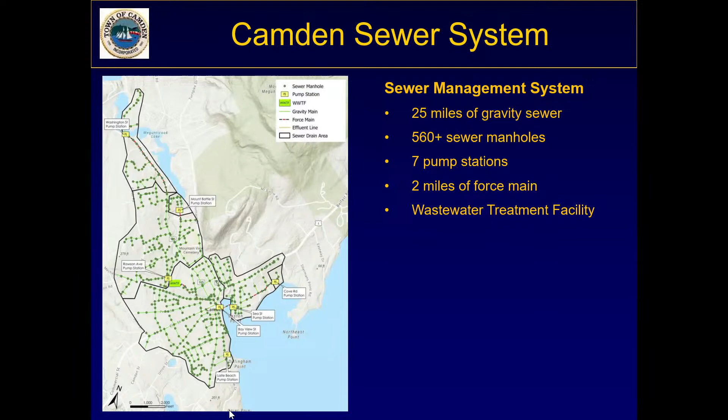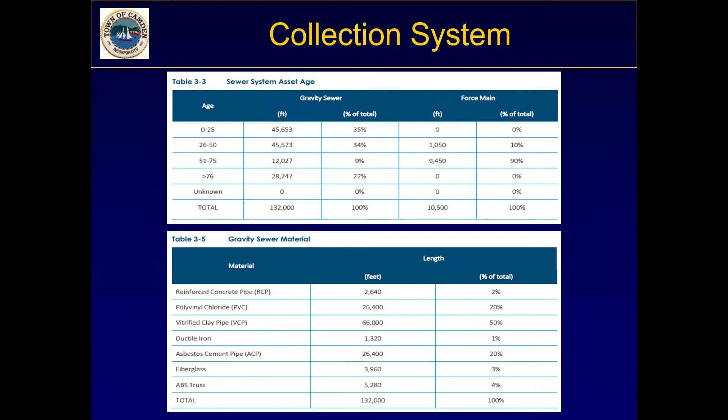The pressure pipes, or force mains, are primarily cast iron. Most of those went in with the construction of the treatment plant right around 1970, so approximately 55 years old. That's right around the end of expected life for a cast iron sewer force main, and in some cases beyond end of life, depending on soil chemistry and flow conditions. So really what I'm trying to show here is that we have a significant amount of older pipe that is probably at or about the end of its useful life.

This is a quick rundown of the 7 pump stations located in our system. The 2 large ones are the Bayview pump station and the Rawson Avenue pump station. Both of those pump directly to the wastewater treatment facility. Actually, all of the flow that comes to the treatment facility comes from one of those 2 stations, with the exception of a single bathroom located at the treatment plant.

Bayview, on a typical day in August when it's not raining too hard and we don't have particularly high groundwater, flow is around 360 gallons per minute. When we have 2 pumps running, we can discharge at a rate of 2,600 gallons per minute. But despite that significant difference between our typical flow and our peak flow, we have periodic sanitary sewer overflows at that location. That means the flow rate coming into the pump station exceeds that peak discharge of 2,600 GPM, and at that point we overboard raw sewage to the harbor. That is a sanitary sewer overflow.

Sea Street is our other location in the system where we periodically have SSO events. That's a slightly smaller station, 70 odd GPM typical flow, 650 GPM peak. But again, because of the peaking factor during precipitation events, we do see SSO events there. I'll get a little bit more detail on that SSO in the next slide.

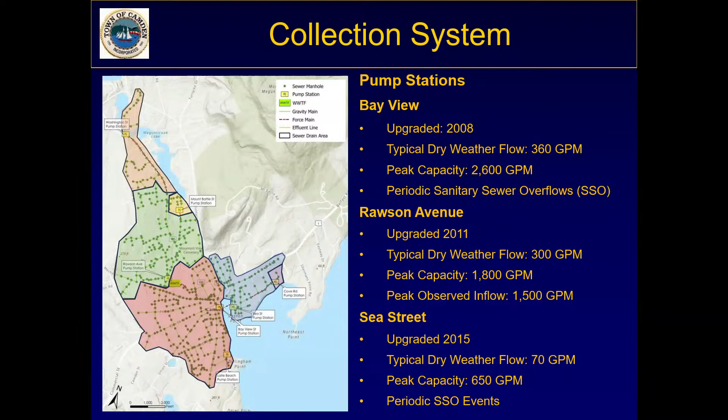Rawson Avenue, our shared pump station, typical flow into that station, the combined Camden and Rockport flows, is about 300 gallons per minute. The peak discharge with our 2 pumps running is 1,800 gallons per minute, and we've had some peak observed flow of around 1,500 gallons per minute. That was during a period of high groundwater and a large rain event, and that represents the most flow we've seen come to the station to date. So that's at about 85% of the station's capacity, giving an idea that if nothing changes with our precipitation events or flow conditions, we still have a little bit of bandwidth at Rawson Avenue. That's reflected by the fact that we haven't had an SSO event there in the recorded past, certainly not since we've been reporting SSO events.

These are our 4 smaller pump stations: Washington, Cove Road, Mount Battie, and Laite Beach. You can note from the flows, these are quite small, more in the 5 to 20 gallons per minute range. I've noted the capacities there. Laite Beach picks up the public restroom and one house, so it's very small. For these stations, this isn't really part of Rockport's interaction with the system, but I note it there to give a full inventory. These are not capacity limited right now, and we don't expect them to be. There's plenty of bandwidth at those stations.

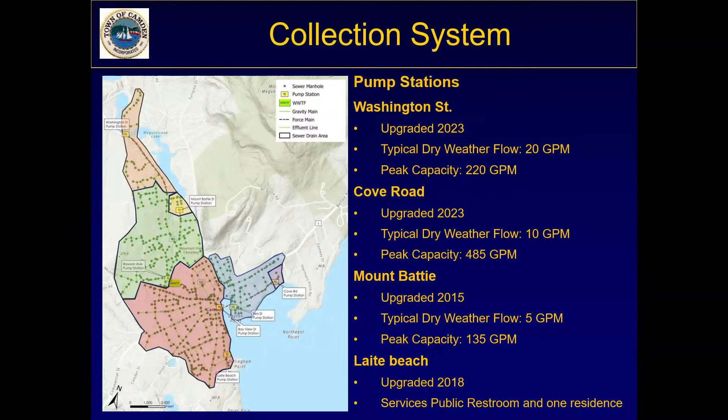So back to the SSO events, the sanitary sewer overflows. As noted, those occur at our Sea Street and Bayview pump stations.

That's where we actually have overflow structures. Typically, we see between 3 and 8 events per year. This graph shows a lot of data and it's a little hard to follow. The orange line shows the annual precipitation amount, and the blue bar graphs give you total volume of wastewater discharged annually.

You'll see that they don't necessarily correlate particularly well. A wet year may or may not have a lot of SSO discharges, and a dry year may actually too, it's not a direct correlation. So what we've seen is that it's really a combination of antecedent conditions that trigger those SSOs, one or more of the following items.

Either we have spring high groundwater tables in conjunction with a precipitation event, or perhaps an extreme high tide event in conjunction with a precipitation event, or there could be frozen ground conditions with a lot of snow melt that could trigger an SSO. And then the really high intensity precipitation events we've been seeing, those 2 or 3 inches of rainfall in a short period of time, often that'll trigger an SSO.

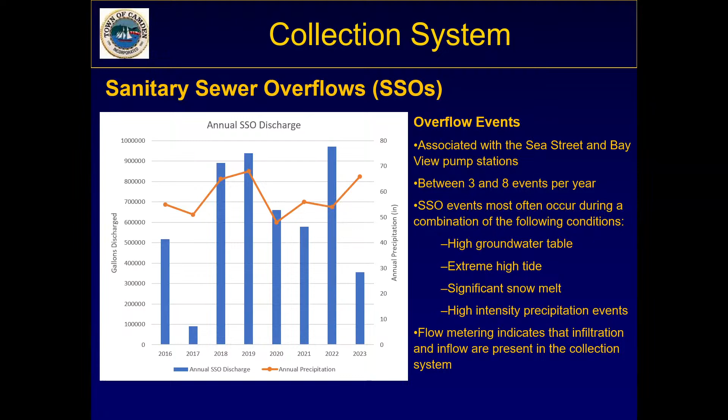Noted here on the bottom, our flow metering indicates that infiltration and inflow are contributing factors to those sanitary sewer overflows. So to give a brief discussion of what that means: inflow is a direct connection of precipitation, rainwater, or snow melt to the sewer system. That could be a catch basin that's tied directly to the sewer versus the stormwater, or a roof leader that's tied directly into the sewer. Those would be some common ones.

Whereas infiltration is really groundwater getting into breaks and cracks in the pipe. So the brown house here is an example of really all the bad things. You've got a roof leader that's connected, a foundation drain that's connected, a catch basin in the road that's connected to the sewer, cracks in the sewer service, cracks in the pipe, and an illicit connection between someone's house and the stormwater line. So that would be a worst case house.

Our blue house here on the right, all is well. The stormwater is directed to the separate stormwater system, and the sanitary sewage is nicely tied into the sanitary sewer system. So again, we're seeing SSOs a lot because we have infiltration and inflow in our system.

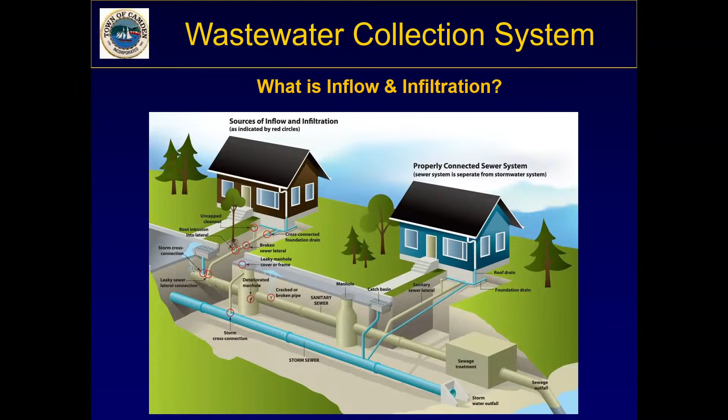Jumping from the collection system to the treatment facility, this is just an aerial photo showing the flow through the plant. Flow from Rawson Avenue and Bayview pump stations comes in to our headworks, where we have mechanical screening, essentially bar racks spaced out to pick up large debris. There's aerated grit to remove sand that gets into the system before it gets sent through our pumps.

From the headworks, after the screenings and grit removal, it flows into our secondary treatment. That's a typical secondary treatment system where they're aerated tanks. We're providing a lot of oxygen and maintaining a population of bacteria and other microorganisms. Those bugs break down the organic carbon in the waste stream for us, and that really is the primary treatment mechanism at our treatment plant.

It's followed by 2 clarifiers. That's really just about creating a big stilling well, a quiescent environment for the water to allow more material to settle out and collect at the bottom of those tanks.

The other thing that we will collect from there and from our secondary is sludge. Sludge is the byproduct of all of those bugs eating and reproducing. They, just like us, when they eat and reproduce, create new cells. That new cellular mass is sludge, and we have to dispose of that sludge. Some of it's recycled, some of it's disposed.

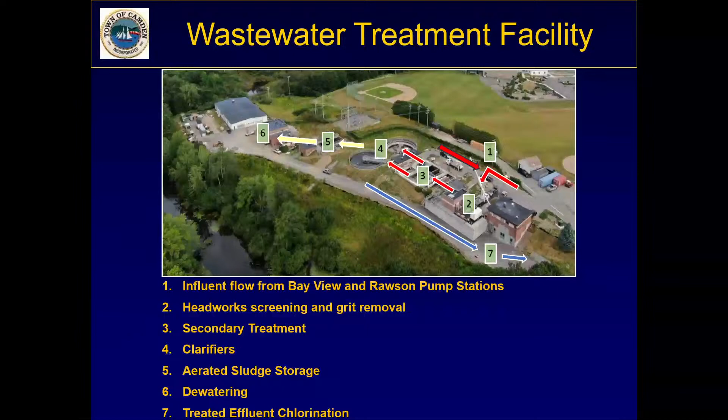Getting into the numbers and some of the details of the standards here, this is our discharge permit, or part of our discharge permit. These are the regulatory requirements imposed on us by DEP for our effluent stream. You can see that they include a flow rate, which is a maximum or an average million gallon per day rate, and we report that on a monthly basis.

BOD, that's biological oxygen demand, really just the organic carbon that's in the waste stream. Total suspended solids, that's whether it looks murky or not. And then fecal coliform, settleable solids, total residual chlorine, mercury, and pH.

So these are the requirements that we sample for on a regular basis, in accordance with the frequency defined by DEP. I'll give an example of some results. Generally speaking, for the parameters you see here, the one we exceed on a regular basis is our monthly average flow. The limit is 1.21 million gallons per day, and periodically we do see exceedances of that, which I'll show in the next slide.

So these are our monthly average flows of the effluent from the treatment plant over the last approximately 5 years. The highlighted cells are the months where we exceeded the permit threshold of 1.21 million gallons per day. You'll note that they occur most frequently in March and April, the periods when we have elevated groundwater table and see high baseline flow to the plant.

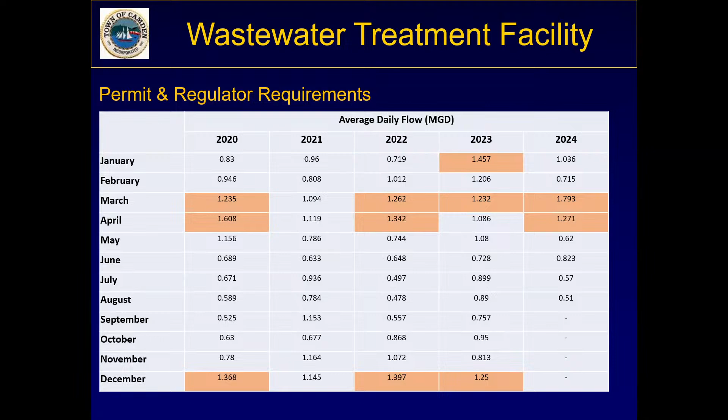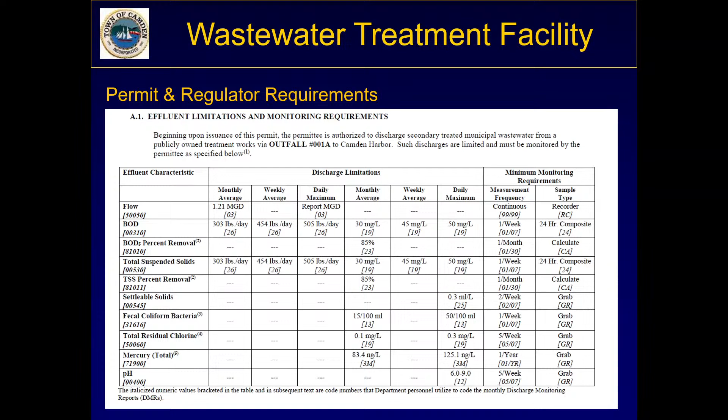As far as other parameters on here where we've had exceedances, it's incredibly rare. Going back through all of the discharge reports, I found 2 exceedances of BOD in the last 5 years, and they were very minor exceedances. I have the hard copy somewhere in that binder over there.

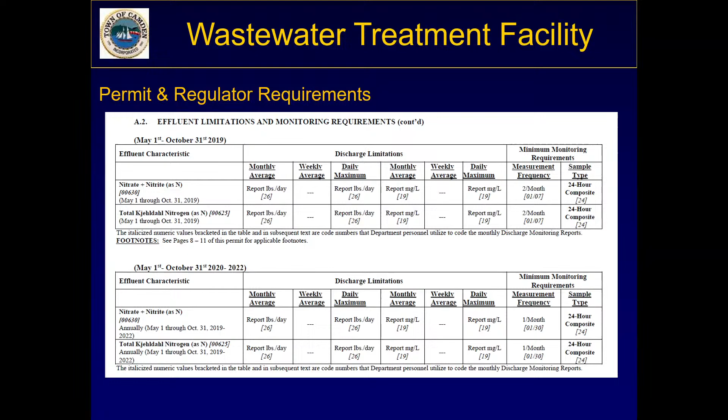The other parameters that we are required to sample on a periodic basis and report to DEP, as part of our current wastewater discharge permit, we were required to sample nitrogen from 2019 through 2022, including nitrate, nitrite, that's your inorganic nitrogen, and TKN, that's your organic nitrogen, or really synonymous with ammonia.

The data from the most recent 2022 nitrogen sampling, I'm putting it up here. You can see that there seems to be a little bit of an inverse relationship between your organic nitrogen and your inorganic nitrogen. That's really a function of how well the secondary treatment is doing at the treatment plant.

Nitrification, which is the conversion of ammonia to nitrite and then subsequently nitrate, can happen in an aerated secondary treatment system if it's operating really well and you've chewed up all of the organic carbon there, which is preferentially broken down before the ammonia. So you can see some months we have relatively high organic nitrogen versus inorganic nitrogen, and then in August, September, they're a little bit more balanced.

I can't speak to whether or not this nitrogen loading is particularly high relative to other plants, or particularly high for Camden Harbor and Camden Harbor's specific mixing and dilution. And I can't really say whether this is going to drive future permit requirements, but I can say that I have every expectation that at some point in the future, a discharge permit from DEP will include limits for nitrogen. They've expressed that to most communities in Maine, that if you have a marine discharge, you should expect to see nitrogen on your discharge permit at some point.

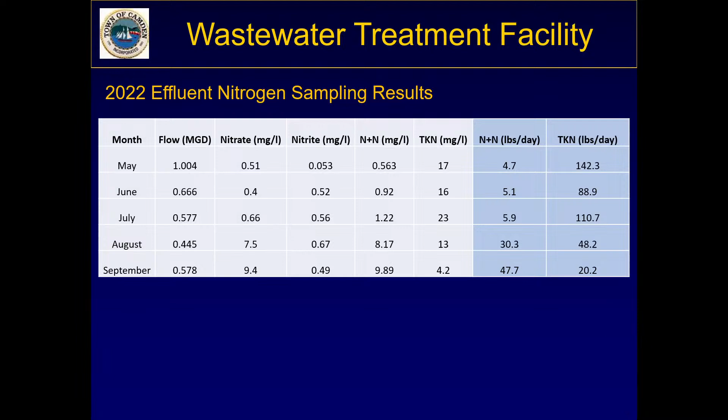It's not there today, and I can't really speak to whether we would be exceeding permit thresholds or not in the future with these numbers. I merely present them because we have them and we can all chew on them together.

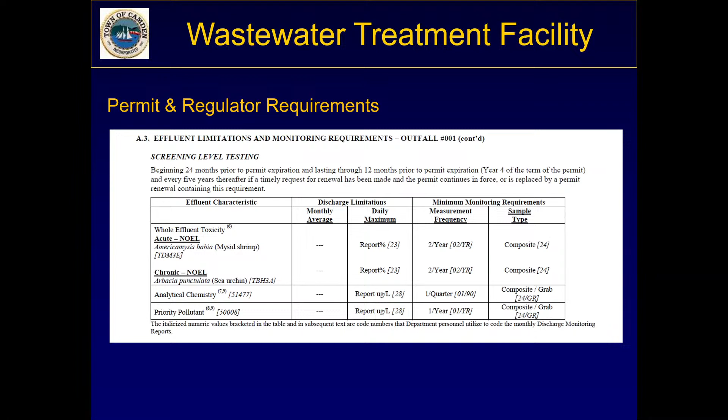Getting into a little bit more analytical detail, we're also required to periodically conduct sampling on the effluent for what really amounts to toxicity and priority pollutants. The whole effluent toxicity, that's looking at the survivability of shrimp and sea urchins in our waste stream. And then our analytical chemistry and priority pollutants are other things we would be looking for, particularly priority pollutants for toxicity in the receiving waters.

This is a lot of data. I'm just going to try and give you a highlight of what it means. The first couple numbers up there are the whole effluent toxicity, or WET, sampling.

This one is a little bit counterintuitive because the number reported is the concentration of wastewater where you start to see a statistical decrease in the survivability of the shrimp and urchins. A higher number is good, because at 100% concentration of effluent, we'd see no statistical change in survivability. If it were at 100 times dilution, so 1%, and we were seeing impacts, that would mean the waste stream had a significantly more toxic impact.

For this round of sampling, the reported value for shrimp is greater than 100%. That means when they took undiluted 100% concentration of our effluent and put the shrimp into it, they didn't see a statistical change in survivability. For the sea urchins, it's 25%, a 4-to-1 dilution, at which they started to see a statistical decrease—I believe it's the fertility of the sea urchins that they're tracking. So those are both pretty good numbers.

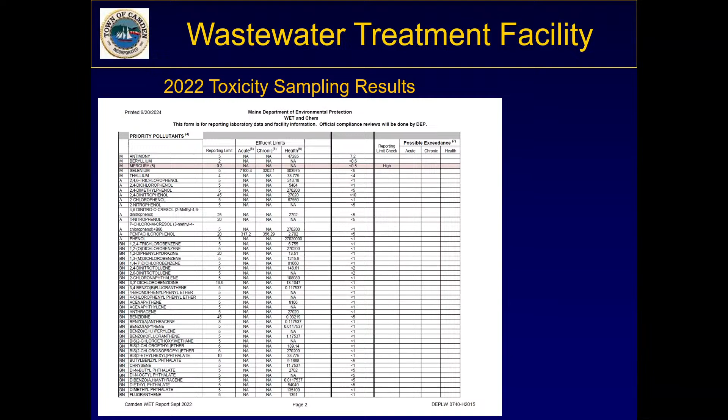And you may have noted—sorry, I breezed past this so quickly—there's a highlight here on mercury. It was below detection, but the detection limit at the time, what the laboratory was able to achieve with this particular sample, was higher than the reporting limit. So that means the laboratory didn't do as well as the state would like.

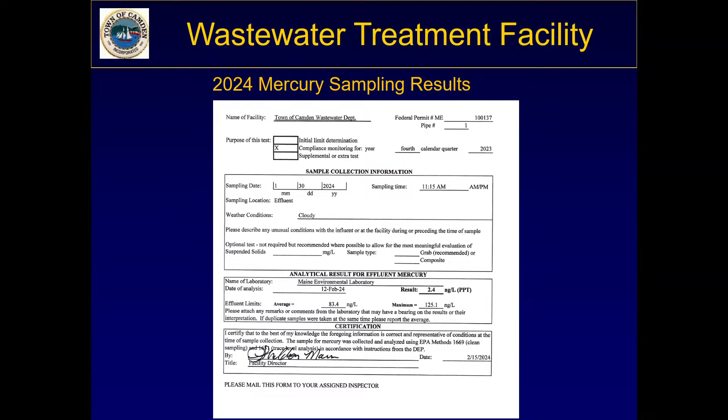We follow up with subsequent mercury sampling with a much lower detection limit via what they call clean mercury sampling, getting a parts per trillion level of analysis. This value, 2.4 parts per trillion of mercury in the effluent, is pretty consistent and well below the average effluent limitations for treatment facilities in the state that have effluent limits for mercury. In short, mercury doesn't seem to be a problem.

PFAS—I'm sure everybody's familiar with PFAS, the forever chemicals most commonly associated with fireproofing, flame retardants, and just about everything we package our food on and make our cosmetics out of. This is an emerging concern, largely because of its persistence in the environment, our inability to get rid of it, and the fact that we don't really know what the impacts of PFAS are on human health or ecological health. DEP has asked us to participate in a couple rounds of PFAS sampling at the plant.

That includes effluent, influent, and various places throughout the collection system. This is really just DEP's efforts to try to understand, not necessarily the magnitude of the problem, but what magnitudes of PFAS are present in these systems. Again, there's an enormous amount of work still needed to really understand at what concentration we start having negative impacts to human health and the environment.

That said, you can see in our plant effluent when we sampled in 2023, PFAS is present at around 100 parts per trillion—that's nanograms per liter. Plant influent, not too dissimilar when we sampled it this year, about 80 parts per trillion.

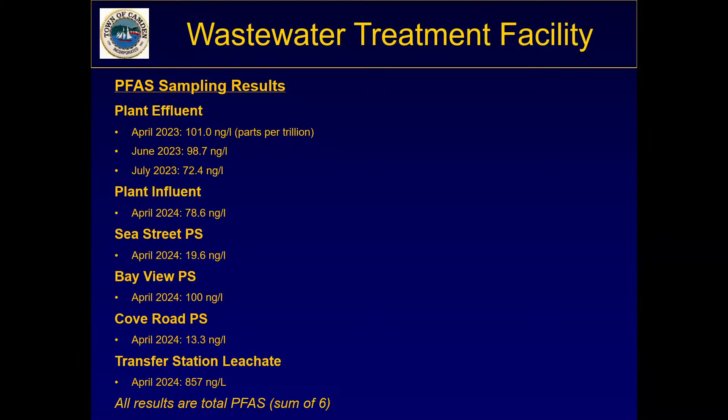We also sampled the leachate coming from the transfer station. When I say leachate, what we were really sampling was the effluent stream from the recovery well at the landfill. That came in at 857 parts per trillion. Landfill leachate is a known source of PFAS.

More data, getting into some flow data. I'm going to jump right to the numbers at the bottom of this screen. This is over the last several years. The total flow through the wastewater treatment facility averages about 27 million gallons a month, and total flow through the Rawson Ave pump station is about 9.2 million gallons per month.

Midcoast solid waste's contribution to that is about 1.7 million gallons. Rockport's contribution is about 2.2 million gallons. Again, this is per month.

So you can see that Midcoast solid waste makes up about 6.15% of the waste stream to the treatment plant, and Rockport makes up about 9.3% of the flow to the treatment plant. Rockport contributes about 26% of the flow to the Rawson Ave pump station. So about 1 in 10 gallons through the plant comes from Rockport, and about 1 in 4 gallons through the Rawson Ave pump station is from Rockport.

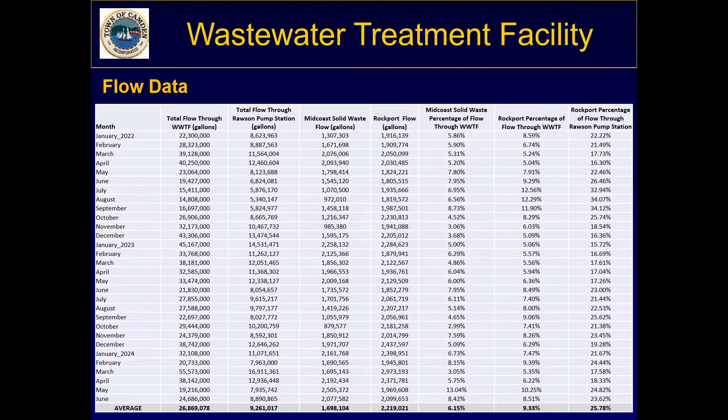Giving you a sense of where the treatment plant is at, it recently underwent a fairly comprehensive upgrade. That upgrade included new headworks, including an automated bar rack to screen out the large solids coming into the plant.

There's a new backup generator — previously the plant didn't have backup power. There were also upgrades made to secondary treatment, primarily new blowers and piping.

The addition of this modified Ludzack-Ettinger process, the MLE process, is essentially an anaerobic or anoxic tank at the head of secondary treatment. This helps minimize or mitigate the formation of floc-forming bacteria, keeping the system less scummy, with fewer floatable solids, and generally improving performance in secondary treatment.

It should be noted that an MLE process is not a nutrient removal process — it's not a nitrification, denitrification process. You may see some improvement in nitrification through the overall better performance of secondary treatment, but it's not designed for nutrient removal. A decision was made at the time of design that they were not going to include this, because it would have required additional tankage to secondary treatment.

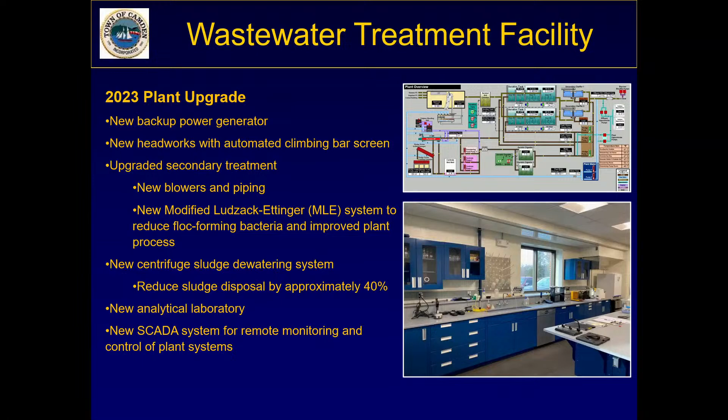That was a lot. I'm happy to answer any questions at the end of this presentation, but right now I'm going to turn it over to Audrey to talk about funding.

So just to give you a little background on how we pay for operations of the plant and capital improvements: prior to November of 2018, any major capital improvements — anything that really needed to be financed — was not paid for by ratepayers. It was something funded by taxpayers.

All the other operations at the plant and some of the smaller capital improvements were funded through our wastewater budget and the user rates calculated through that. The reason that changed was that in order for Camden to receive a $1.4 million grant for the plant and collection system upgrades, we had plant upgrades, but there were also some major upgrades to the collection system that occurred as well.

The force main that connected the Sea Street pump station to the Bayview Street pump station was replaced, and there were a number of the smaller pump stations that were completely upgraded as part of that.

That grant money combined with a very low interest rate fixed over 30 years was only going to be possible because this program through USDA Rural Development required funding through user rates as opposed to taxes. So the decision was made by the select board and then by the townspeople to shift the funding model.

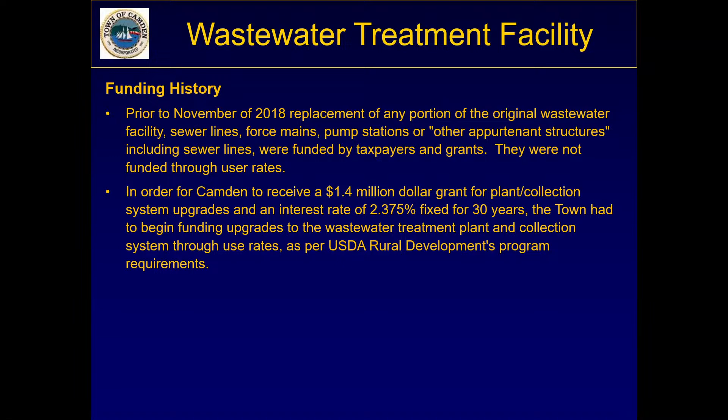For a period of time there was a recapture agreement, but by the time the actual debt service for the project needed to be paid, there was a charter amendment that allowed those improvements to be financed by ratepayers. This is important because it changed the billing structure, and it's something I think Rockport users on the Camden system notice.

FY20 was really the first year that the town created and funded an account specifically for the purpose of not creating a shock to users when we had to make the debt service payments for the treatment plant upgrades, because there was at least a 3-year period between when we got financing for the project and when we were actually paying the debt service on the improvements once the project was completed.

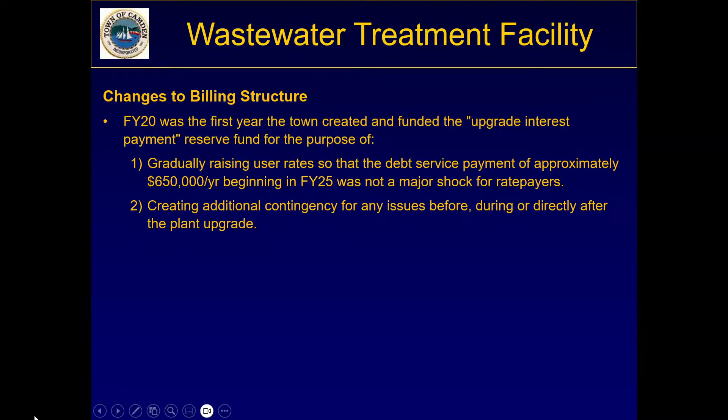Over this time, we wanted to gradually raise user rates to prepare everybody for that debt service payment. Now we're in the second financial year where we're paying that debt service, and it's about a $650,000 payment per year. The idea was to get everybody accustomed to that, as well as to have additional contingency for any issues that occurred before, during, or directly after the upgrade to the treatment plant.

2020 was supposed to be the first year that an additional $100,000 was placed in that reserve account. However, for some reason, the billing information wasn't changed with Maine Water.

Around 2021, and I think this is something very familiar to everyone, the rate increase from both 2020 and what was budgeted for in 2021 was spread across those financial years. So that was quite a significant increase over that period of time.

We continued to up the amount that we put into that account for 2022 and 2023, and then we stopped funding it in 2024 because that was the first year of our debt service repayment.

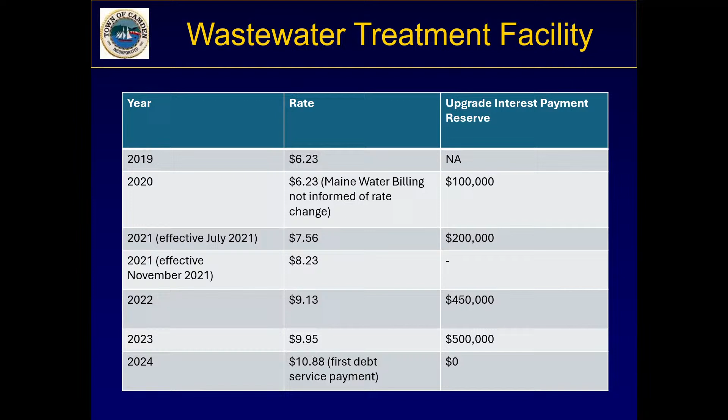Is that then showing that the rate changed mid-course of that fiscal year? Yes. So that rate changed twice over that period - there was the original raise in rate, and then midway through the year another increase, basically up $2 per 100 cubic feet.

Over to Dave. Okay, now we've gone over basically the whole system. Audra's gone over the financial part. Now we're going to talk a little bit about what we're going to do to try to correct these problems that exist.

I'm going to talk about the collection system priorities: the rehabilitation and replacement of aging infrastructure, the mitigation of SSO events, the expanding of public sewer to unsewered areas, and upcoming collection system projects, including sewer rehabilitation and replacement on Mechanic Street, Limerock Street, Union and Mountain, and sewer extension on Molyneaux and John Street.

On Molyneaux, we're extending the sewer to service 52 units at the Mountainside community. On John Street, we're basically putting in a new line that doesn't exist there to serve about 20 to 25 single-family homes, along with an upgrade to the sidewalk.

On Bay View and Rawson Avenue stations, we're looking at a force main replacement, and Justin had touched upon that - we're kind of at our life expectancy for those two force mains. So we're looking at these collectively, but we're looking at these projects.

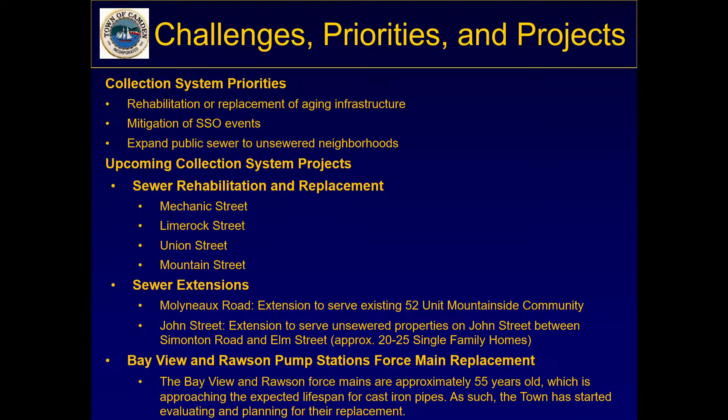So how we're doing that is we're using a project priority sequencing and project completion matrix, which looks at all components of a road. And when I say a road, I mean all pieces of it.

This is talking about sewer condition, stormwater condition, sidewalk and multimodal needs, water, potable water, road surface, traffic calming, shade trees, and matching funds. So all these mean something when you look at a total road. What we're doing is basically the driver for these projects is our sewer system, because our sewer system is our deepest utility within the road, and it's the most expensive to replace.

So we're going through and systematically cameraing these lines and then giving these a grade of between 1 and 5. And then based on the results of all of those criteria, we'll rank which one of these projects rises to the top. By using this process, the objective is to tackle the larger problems and at the same time resolve most of the problem with I&I.

As you can see, we're under evaluation on Limerock Street for sewer conditions, as well as on Mechanic Street. We are finding some significant problems on Mechanic Street, which also happens to be where we have our force main that's going to the treatment plant. But we haven't completed the whole process yet, and once that's all done, that'll help guide us in the right direction to use the $12.5 million funding that voters approved in a bond to make these improvements.

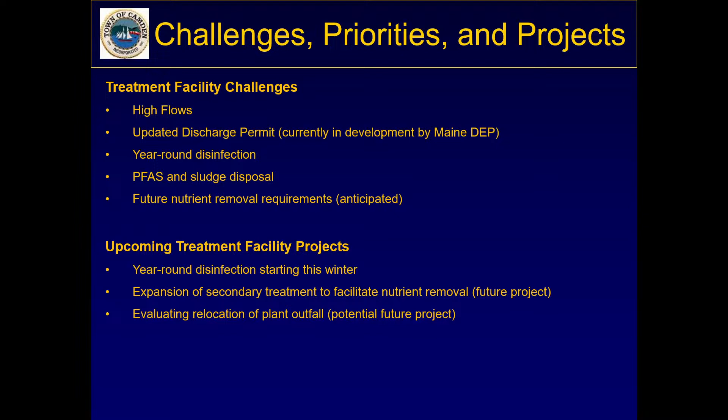That's pretty much it. I think Audra and Justin did an excellent job, and we have a really good team, and I think we're going to be able to make some massive improvements with the system. But that's where we're at, and we're looking forward to hearing what the Rockport collection system is all about.

So if there's any questions about our system, we're more than welcome to answer them. We can probably all come up here, and the three of us can chime in on whoever has probably the best answer. Or we could do rock, paper, scissors, and we'll get that person.

No questions, I'll stay seated. Alice.

I don't know how much this might not be something you're prepared to answer today, since we're just getting started with the new permit, but the classification of the water body we're discharging to is a huge driver of the standards. My understanding is we're currently at Class B, and there's been talk about wanting a higher standard in the future. The driver of this permit has been just not making it much worse. Is that part of your calculation, or do you have any idea?

No, not at this time. I will say that in '23 the previous superintendent submitted the application for a new discharge permit. I think our current permit expired at the end of '23, and DEP is taking, in some cases, 2 to 3 years to issue a permit, but I understand they've hired new permit writers and are speeding up turnaround. Coming from South Portland, we waited 3 years for a new discharge permit after ours expired. The feedback I've gotten from folks who were here when the application was submitted is that we likely won't see significant changes to our effluent requirements with the next permit, except for the requirement of year-round disinfection. So we're not tracking any major changes to our discharge requirements for the permit we're currently expecting. But that's not to say it's strictly a 5-year renewal cycle—the next one should be around 2028, but it'll probably push further. I can't honestly speak to that beyond what I've said.

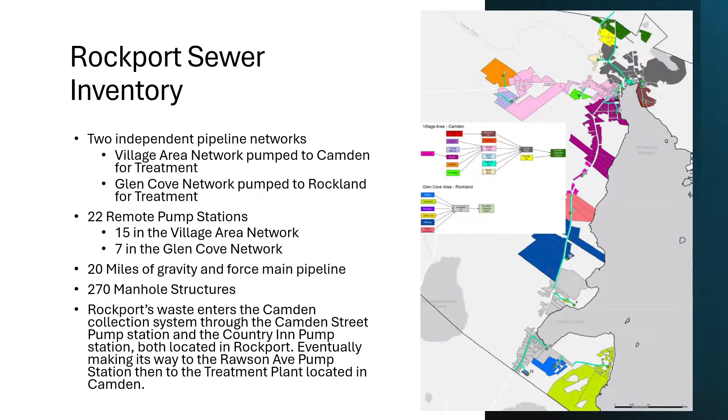That pump station's right on the side of the road. That's where Rockport's waste largely comes in. We also have the Country Inn, which is a separate entry point, but predominantly most of what we have is coming through Camden Street.

In terms of our flow data, currently our billed usage is around 49,100 cubic feet, which equates to about 99,000 gallons a day for our entire system. Our average annual usage to Camden is about 63,000 gallons a day when you average it out, or 63% of our total flows for our entire system come to Camden.

Which only represents about 39.4% of our allocated allowance in the last interlocal agreement. Our average usage to Rockland is about 18,100 cubic feet, or about 37% of our total annual flows. So about two-thirds of our flows come to Camden, and the remaining third goes to Rockland.

We undertook a significant I&I study in 2019. At that point, we did individual inspections of all of our properties that were either connected to or had the ability to connect to our sewer system. We were able to complete this effort in a five-month period, that summer into the fall. We did find some illegal connections and corrected those at that time.

In the summer of 2019, we also replaced ground piping on School Street and Summer Street, which eliminated some I&I and stormwater issues that were happening on those roads. And as we continue to pave roads that are on our sewer system, we make sure that we are inspecting the in-ground pipes before we are laying new pavement.

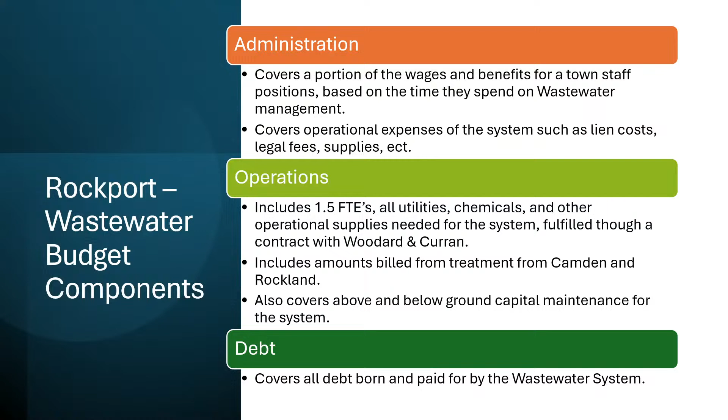So our billing is very simple in that it's largely farmed out. We work with Maine Water. Maine Water circulates our bills on our behalf. We have two separate fees that are part of our bills. I'll do it in reverse order.

Usage is very clear to understand: you use this much water, you're billed this much wastewater. If you have a well, there are certain provisions for that as well, but we'll put that aside. Secondarily, we have a debt service fee, which covers our debt and capital costs.

I would love to get more data and more flow data, so I was looking very carefully as Justin was reading. Maybe we can swap notes at the end, but the prior agreement talked about 161,000 gallons per day. In the past year, we used somewhere around 5.8 to 7.4% of that permitted capacity. With the improvements made, which is what Megan referred to, going door to door with our I&I improvements, we've stayed below what we had seen.

So what we have is usage in that mid single digit range, with a reserve capacity of 12.5% as part of the old agreement. In recent years, the amount of money we've spent is somewhere equivalent to about 15 to 25%, depending on the year and the amount of capital and different needs, but roughly it's in that range.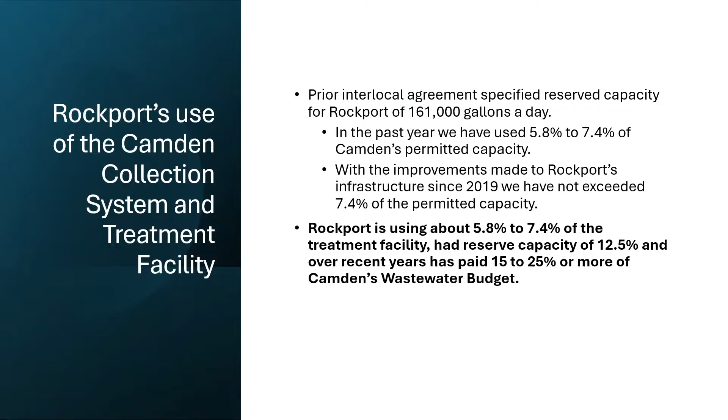That's a challenge, and I think Audra did a fine job describing that shift of when the town of Camden had to change its methodology for how those capital projects are funded. It created probably an unseen ripple that's still being felt today, and that ripple is a lot of the conversation where some of this comes in.

So if that 12.5% number was used, you'd be talking about a rate equivalent of $8.21.